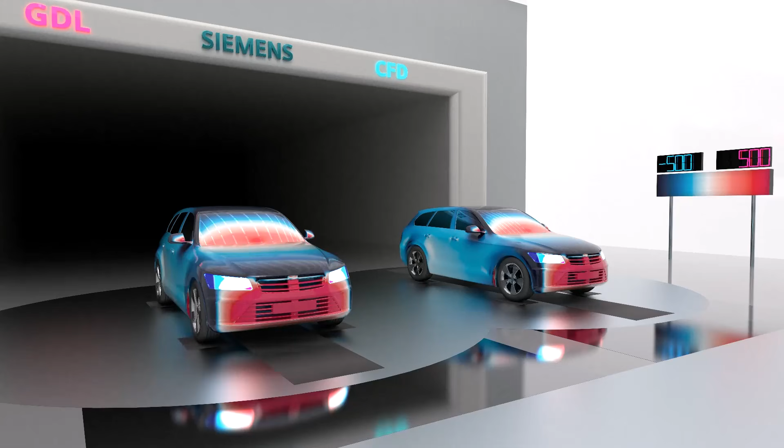From days to seconds. Is it really that fast? And can we trust it? And is this the end of CFD careers as we know them?

Today we are bringing geometric deep learning to Simcenter STAR-CCM+.

My name is Rodolfo Piccioli, and together with me in the London Hammersmith studios is Monsieur Cédric Tachot from the product management team, who will help us separate the hype from reality. Cédric, bonjour, welcome to the London Hammersmith studios. Thank you, buongiorno, Rodolfo. Buongiorno. That's my full capability in Italian, sorry, but I did my best. Happy to be here. Let's stick to English then, yes.

So, geometric deep learning. First and most important question, how do we do it in Simcenter STAR-CCM+?

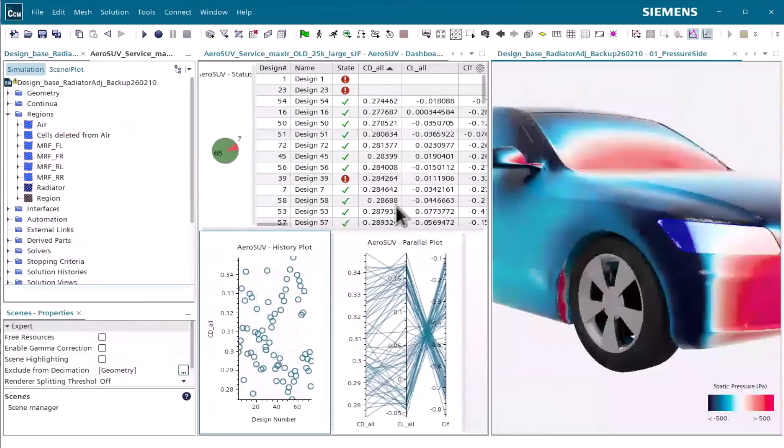Let me set the ground and explain a little bit what we are talking about. We are talking about using AI to predict results extremely quickly, in seconds or minutes, depending on what you want to do your prediction on, whether it's scalar values or scalar fields. Our idea was to provide a smooth workflow contained inside a CFD tool, STAR-CCM+ in our case, with all the steps from building the training dataset to the inferences in one single, familiar environment with a smooth workflow. So that's what we did.

So results, you said in seconds or minutes, but can we trust them? That's one of the big questions. How much trust can I put in AI to know how predictive a model, a regression model using AI, can be? It's like any other regression model. So we need, at some point, to check on unseen designs and compare what is the prediction, what is the real result, how much am I different. And we're providing tools to quantify that.

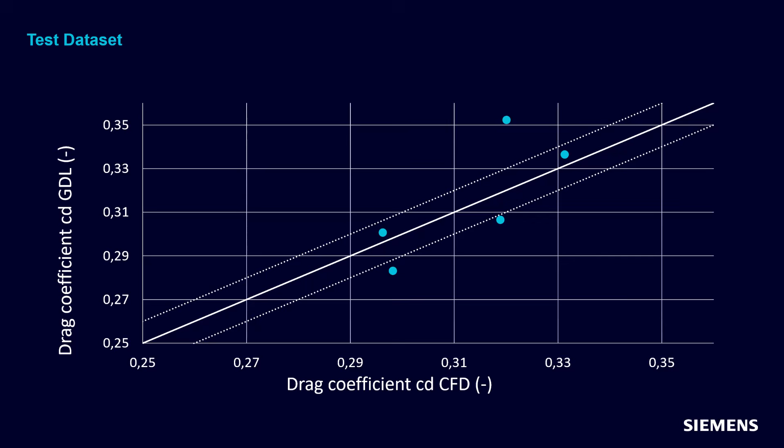So how much, with R² or any classical error metrics that we have, am I capturing the trends? Because when I'm using an AI regression model, I need also to be sure that when the drag is decreasing for some reason, if I'm having the same sequence of design, whether I'm using AI or CFD, I should have and I must have the same trends. So we're also providing tools to check that accuracy, and with that accuracy check, I know how much I can trust my model.

If we go back 20 years ago, which is roughly when we started doing CFD, people were not trusting CFD at the time, and it was always necessary to have experimental measurements to keep CFD grounded. Nowadays, actually, CFD for many applications is considered the ground truth. So what is, in 2026, the relationship between AI and CFD?

I think the parallel you're doing is really valid. So today, with this feature, we are capable of starting to predict results really quickly. So the question is, how much trust can I put inside it, and how can I make my engineering decisions? Because at the end of the day, that's what matters. I mean, we are doing simulations to provide answers and to make engineering decisions. So those decisions can be AI-driven.

Now the thing is to validate and to make my final decision. Today, in 2026, I will need CFD to validate my AI result. Today, that's the way it is. I don't know about tomorrow, I don't know what will happen in the upcoming years and what will be the next technology step or leap. But today, I think this parallel you made is really valid. We can see CFD today as experiment was seen 20 years ago, and AI today as CFD was seen 20 years ago.

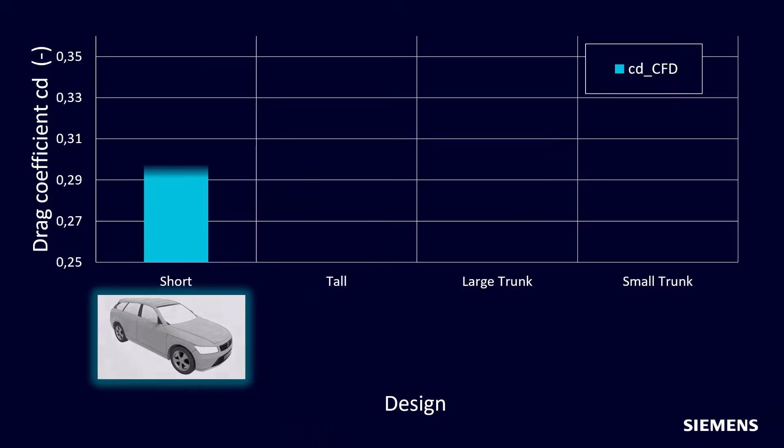In terms of definition, a scalar value, a quantity, is basically a report from STAR-CCM+; scalar fields, field functions, whether it's in volume or surfaces. If we stick to an example of external aerodynamics, a scalar value would be something like the drag coefficient, lift coefficient, and surfaces and volumes would be the pressure field, the velocity field, the turbulence fields, either on surfaces like plane sections or the entire volume.

Correct, that's it. So based on the information that we have, we do our training. We specify during the training what we're interested in. We won't train an AI model on everything.

We'll train it on purpose to answer the engineering questions we'll have in the future. Behind the scenes, I'm doing two trainings: one for the scalar engineering quantities I'm interested in, and one for the fields. The first is faster to obtain, the second helps me as an engineer understand the behavior better.

It depends on your objective, so both solutions are valid. You have workflows where you want to leverage AI to drive an optimization study faster. You can leverage AI and your regression model to run an optimization study, and in that case you only need a scalar quantity, a scalar value. So direct KPI prediction is perfect for that.

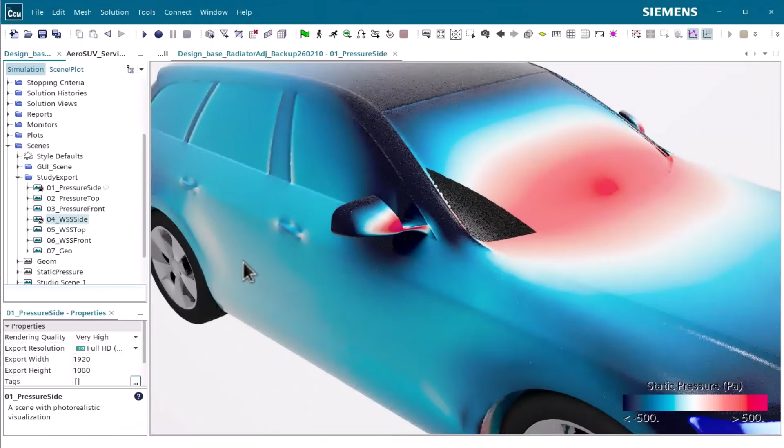Now, when you find something interesting or really bad, you can look at your fields again to understand better. So there's no one-fits-all answer to your question. It really depends on your problem, on the engineering question you want to answer. The fact is KPI predictions are faster in terms of training and inference.

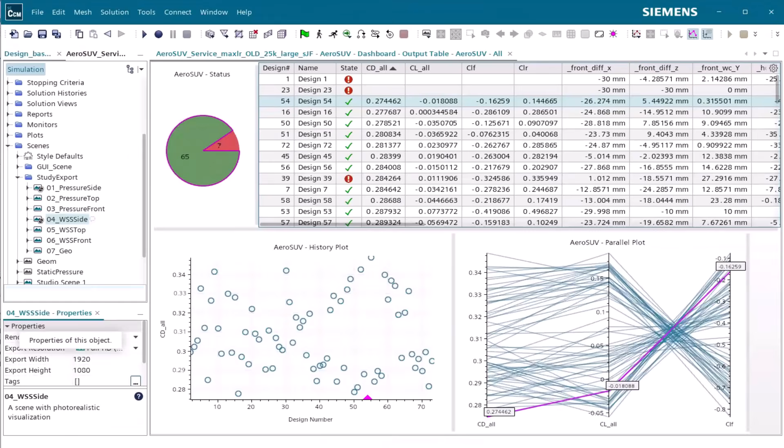Scalar field trainings are slower, and inferences are slower, but they provide extra information. Right, and very, very exciting.

Shall we have a quick look at how this works? Sure, so let's connect to Toby, and yeah, he's here. Hello Toby, how are you today? Hi Toby, hi Rodolfo, hi Cédric. All good here, thank you. Good, good, all right, we are doing very well as well here.

And, do you want to say a few words about yourself please? Yeah, thank you very much. So I'm an application engineer working in the global support team, and I have a specialization in AI for simulation. Geometric deep learning is basically my specialization.

Okay, so right person at the right time here. Please go ahead and tell us something about geometric deep learning then. Yeah, so today I'm going to show you a little bit about what geometric deep learning is going to look like inside STAR-CCM+. And we're going to start here in Design Manager, where we need to generate some data.

In Design Manager, it's perfect for generating data. You can provide a base sim file, and then the field functions, KPIs, scenes, and reports that you would like from your sim file. Based on this, you can run a study, and then you'll be able to visualize it with your design table and your scenes, all in Design Manager.

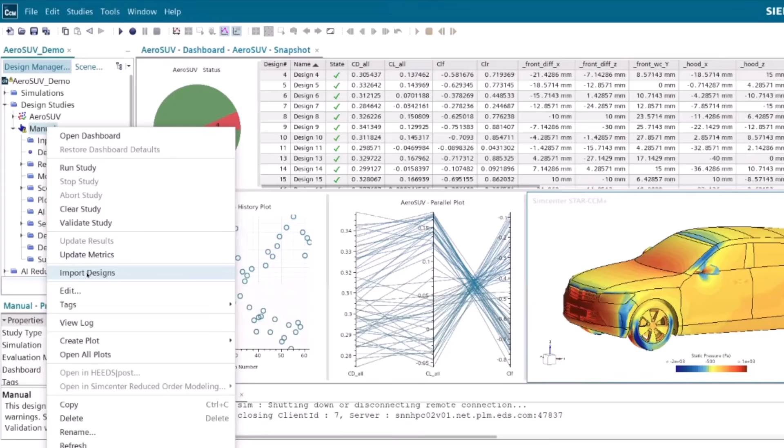Yes, if I already have some data because I ran, let's say, a DOE study in the past, can I reuse those? Yes, we now have a functionality in Design Manager where you can import sim files from a previous DOE, which will save you time running all the CFD, and you can use those as well. Thank you, please.

So the next step, once you've run your DOE or imported it, is to make an AI ROM dataset. Essentially, you just need to fill out the KPIs that you want to learn, and Design Manager will then fill in the field functions required for all of those KPIs. This is then saved in Design Manager, and you're free to start AI ROM training.

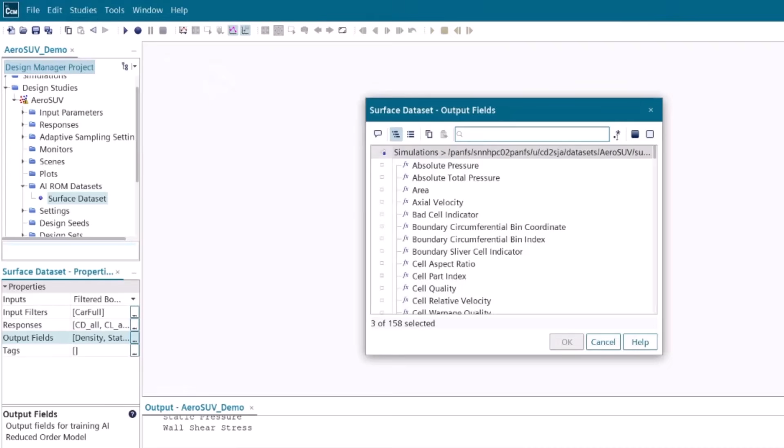So the first step in AI ROM training is you need to select your dataset from the saved datasets you have in Design Manager that you've just made. And then you need to choose your hyperparameters. The most important hyperparameters we have are the number of epochs, how long you train for, the max learning rate determining your step size, and also things like the number of points that you choose to pass to the model.

Okay, so to say something more to the CFD engineers, who are probably most of the attendees today, the epochs correspond more or less to the iterations in a CFD simulation.

The number of points—we are not doing the training over the entire mesh, which can be hundreds of millions or even billions of points. In order to save memory, we are doing the training over a reduced number of points. A CFD mesh has millions of points, and we can't fit all of those points and data on the GPU, so to save space, memory, and time in training, we take a subsample of all those points and pass just that for each design to the GPU.

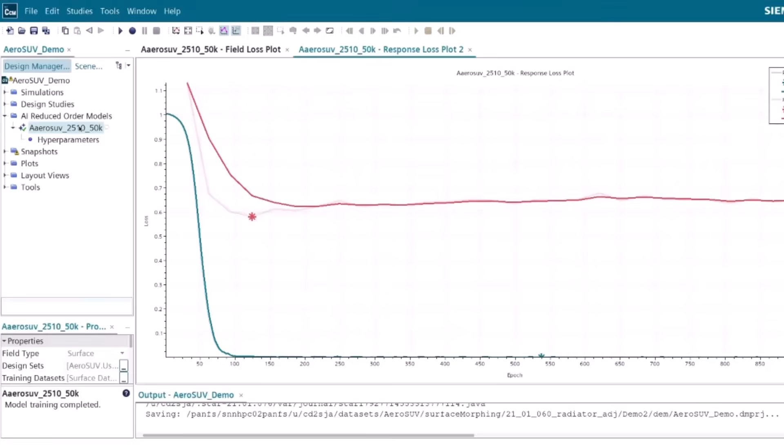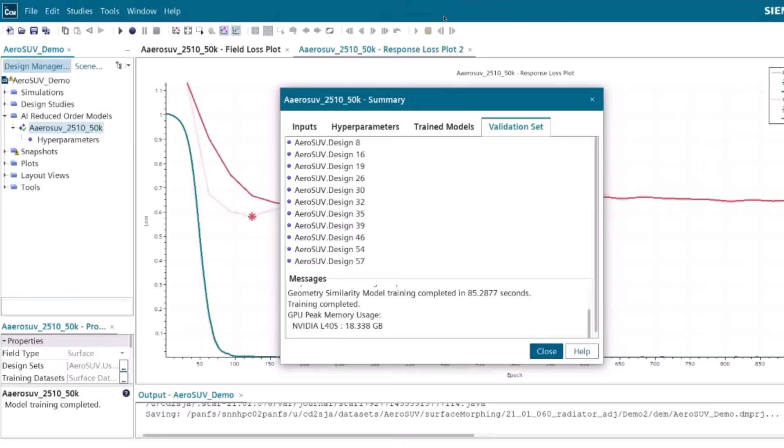Once you've analyzed your loss plots and you're happy with the convergence of your training and validation loss, you can also view the metadata of your model in the summary section. This includes the inputs into your model—your data, KPIs, and field functions—as well as the hyperparameters of your model architecture, the location of the models on your disk drive, and the validation sets. This allows you to compare metadata between models and make sure you don't copy any in future iterations.

Once you're happy with your model, the next step is to validate it with a test study. The whole point of a test study is to infer on the geometries you set aside. Your model hasn't previously seen these, but you can set up a test study and infer on your zero-D KPI and field model. This comes in through Design Manager, and you'll see your design table with the predicted KPIs, and also be able to visualize your fields in a scene.

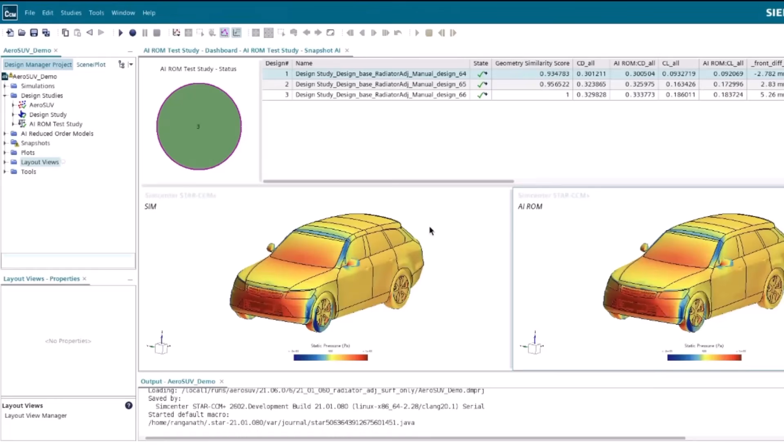It's all well and good being able to do a test study within Design Manager, but you may also want to infer your model on an STL from somewhere else. We have the functionality to do this, and you'll be able to provide external STLs and get a rapid inference of a zero-D KPI, something like drag coefficient. You can do this through a response study, and provide any STL you like from any dataset.

That's pretty much it for geometric deep learning in Design Manager at the moment. I'm looking forward to you guys testing it out. I've been having lots of fun with it so far, so I hope it's useful to you as well. Looks amazing, and I definitely look forward to using it as well. Thank you very much, Toby, for being here with us today. Thank you, Rodolfo. Thank you, Cédric.

Cédric, back to you. Can we use geometric deep learning in Simcenter STAR-CCM+ for both analyzing geometric changes and boundary conditions? Let's stick to the external aerodynamic example—if I want to see how the drag changes when I change the inlet velocity, can I do it? Yeah, obviously you can do it. In a nutshell, this AI ROM doesn't need to rely on geometrical parameterization, so we are taking into consideration changes in terms of boundary conditions and all of that.

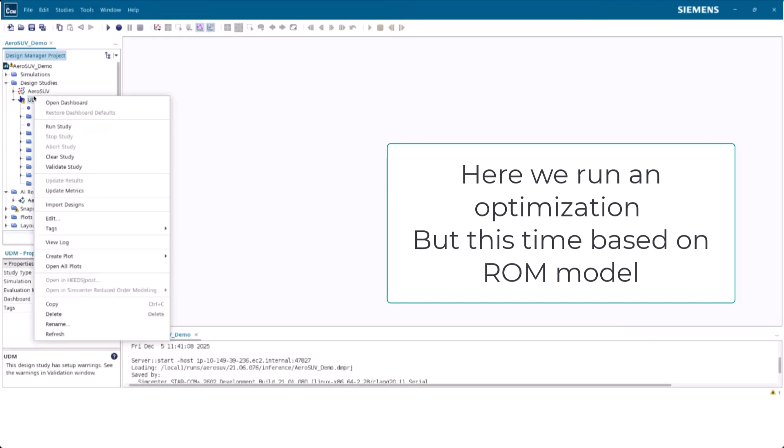And actually, we already had this with surrogate models. That being said, you can do whatever study you want, including optimization, changing the evaluation method to reduced order models, whether they're from AI or not. So your AI reduced order model fits into your process, and instead of calculating using CFD, you predict your scalar values really quickly, and your optimization algorithm, in our case Sherpa, will drive it and do your optimization for you. You just have to say what your budget is.

When we're talking about AI, I can do thousands of simulations in seconds. I can run my optimization for 5,000 designs and get an optimal solution according to the parameters I set. In my introduction, I asked the provocative question: is this the end of CFD careers as we know them? I guess this is a tough question to answer. Let's try to simplify it a little bit.

What are the user personas we are targeting with geometric deep learning in Simcenter STAR-CCM+? So for user personas, you have two different things: training the reduced order model is one bit of it, the other is using that reduced order model to do predictions or inferences.

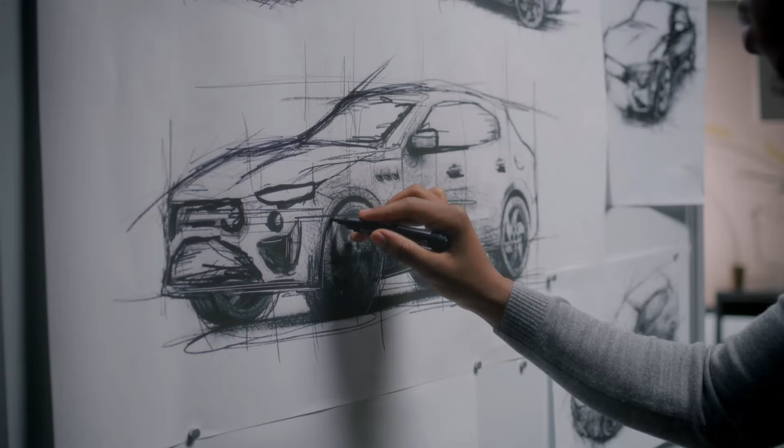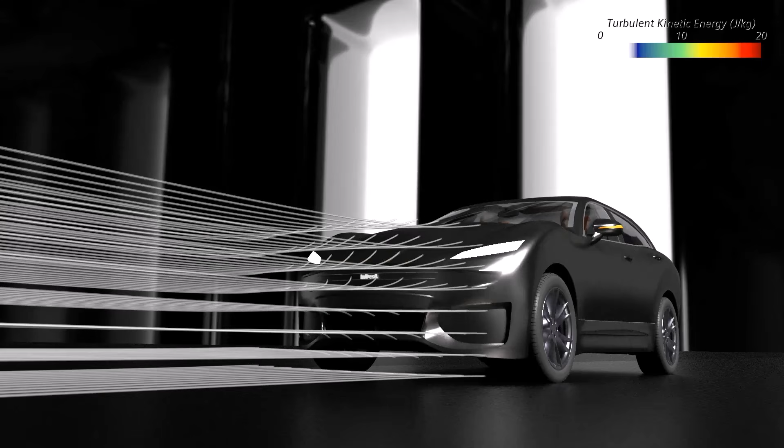Usually I have stylists that are doing that. After they have an idea, they give it to a CAD team that creates a geometry out of it. What if those people could have tools when they are creating the geometry that tells us, okay, what you modified here will impact the drag, will increase the drag, or will lower the drag. Even if they are not CFD engineers, they are interested in that.

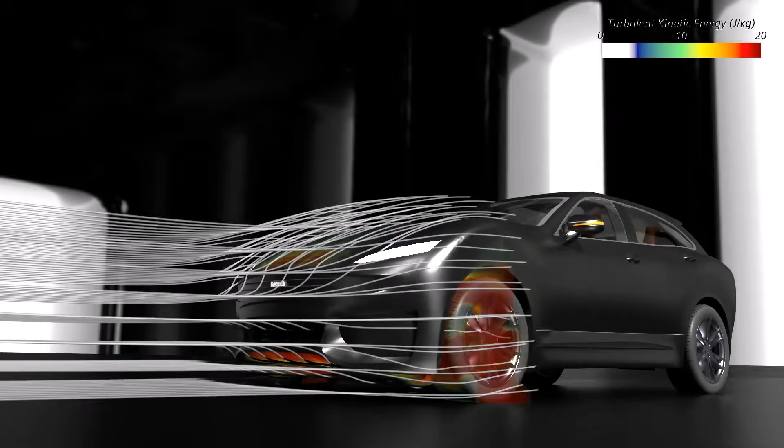So we want to go that route. And even earlier for the stylist himself, when he is playing with clay, or depending on how they are doing it, they could have insights already based on the shape they are having, what impact it will have on the drag using an AI-trained model. So that's definitely a user persona we are targeting in the future. First CFD engineers, CFD users, but it goes beyond that, depending on your engineering problem.

I think the quote that CFD engineers will not be replaced by AI, but CFD engineers who don't use AI will be replaced by those who use it, might be true also in this case. Probably. Yeah, and some more technical questions.

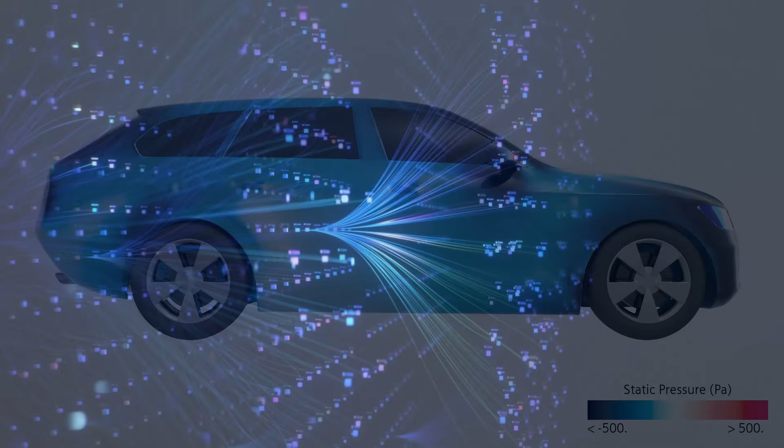Hardware, you have some keywords here already. AI. In my mind, I hear AI, GPU. So obviously, to do an AI training, yeah, I said obviously, but it's not always obvious, but we are leveraging GPUs because they are faster for those calculations. So an AI training is definitely faster on GPU, and it doesn't worth it to do it on CPUs. We tried, it's crazy slow. So GPUs for training.

For inference, the question is raised again because it could worth it. An inference is crazy fast. We are talking about seconds for scalar values. Fact is, it's 10 times faster using GPUs than CPUs. So we are providing a framework that works only with GPUs. And as of release time, when I'm talking right now, it's only NVIDIA GPUs, but it will be expanded to other GPUs soon. Are there applications that we know work better than others?

I can tell you that we tested it heavily on external aero. We know it works. We tested it quickly on other applications. It works. So today I'm giving a lot of examples around external aero because we intensively tested it. But this technology is not restricted to one given physics. It's not even restricted to CFD. You can use the same technology on FEA, on Crash, on whatever.

Excellent. And last question, licensing. Yeah, licensing. So this is a new capability. It involves new possibilities and it creates new added value. So as you can expect, there is an additional license attached to it. Only one license to do both training and inference. So with that additional license, you do your training. When you're finished with your training, you do as many inferences as you need.